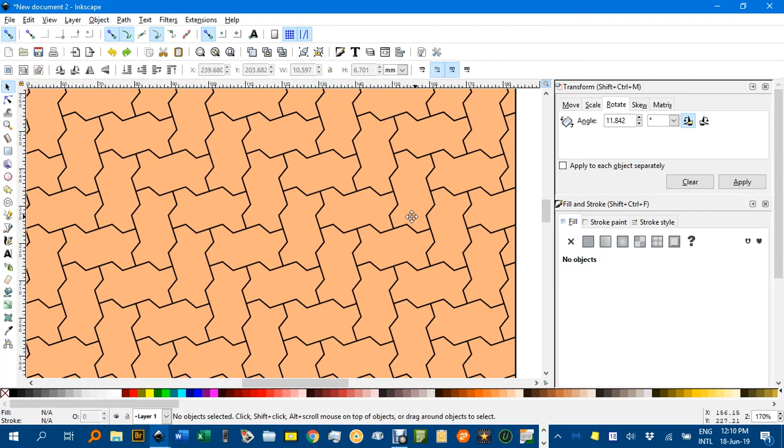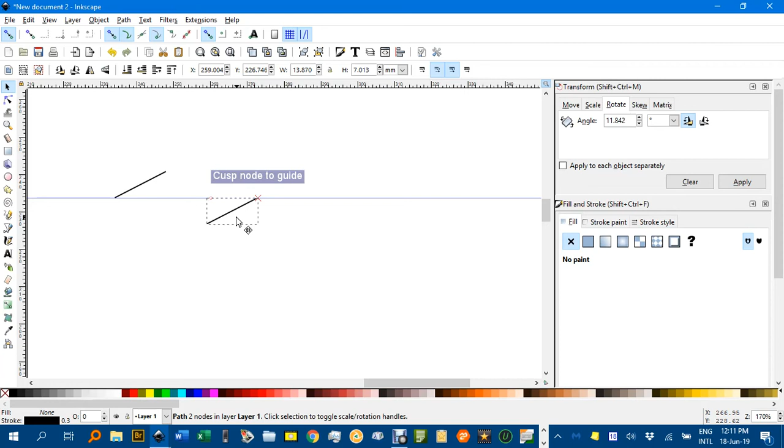If I move across, first thing I'll do is drag down a guide from the top ruler, horizontal guide. Then with the Bezier pen tool I'm going to click there and whatever angle you like, something like that, click and enter. Then select tool, Control D to duplicate, and I'm going to drag a copy of that so that it finishes on the same horizontal line.

Then select both of them, N for the node tool, just drag around those two middle nodes, and we want to join them with a segment there. So that's our key component. Now that I've got that, I don't need the guide anymore. I can drag that off.

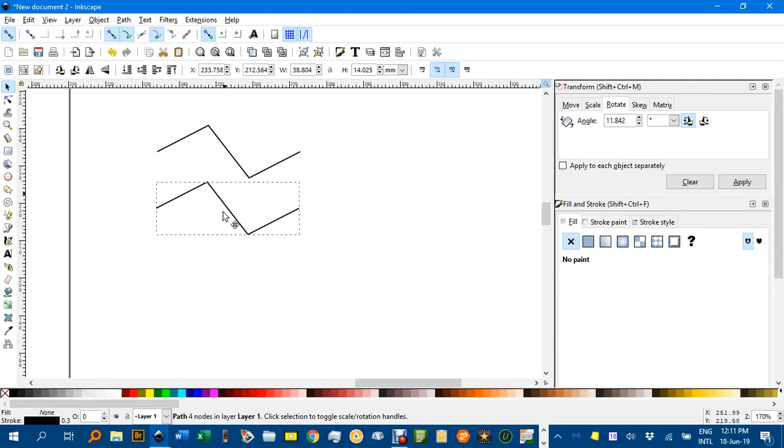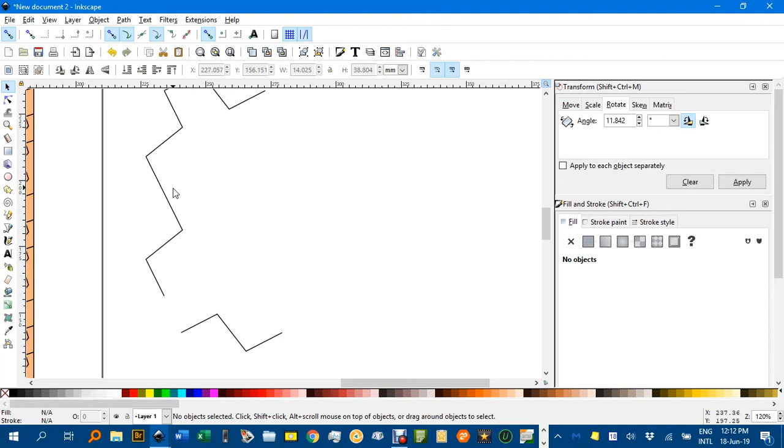Select that, Control D, and Control drag down. That one, Control D again, rotate, and let's snap it there. I'll zoom out a bit, and Control D again, snap it there. I don't want it snapping to the bottom one, I want it snapping to that one there. It's important that this section here is twice as long as the individual sections there.

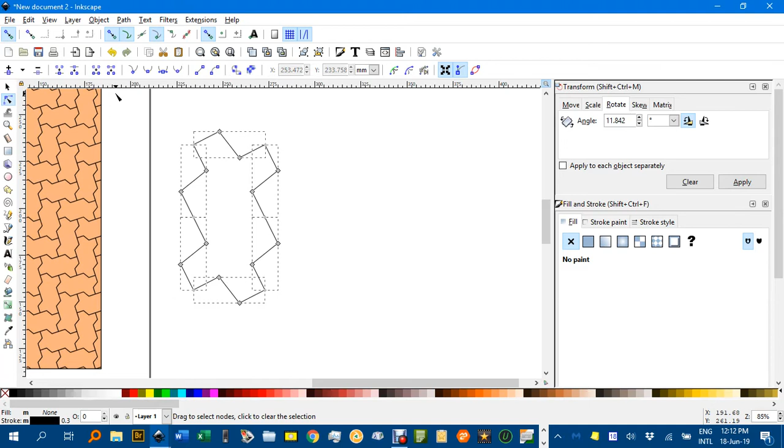Now if I shift click both of those, Control D and drag it across to there, this one should now fit and it snaps into place. Make sure you've got snapping tools turned on up here, snap to paths and cusp nodes. With that all selected, I then hit N for the node tool and then drag another marquee to highlight the nodes and click this third icon here to join the nodes and make it one object.

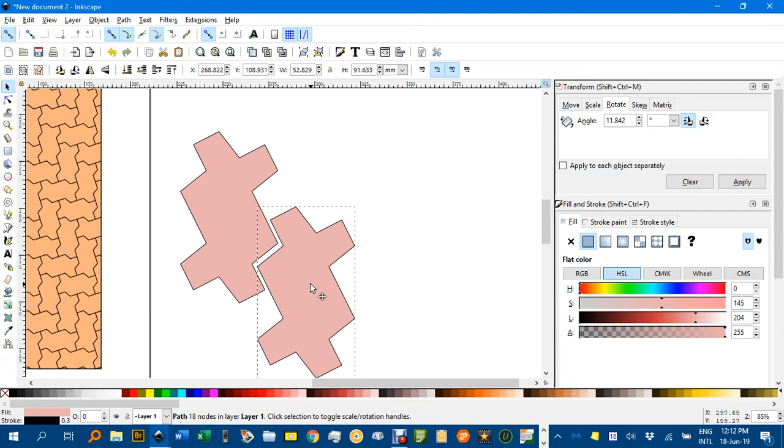I can give it a coloured fill if you like. If you want black and white, just leave it, but let's say I want that colour there. Okay, now I Control D and I can drag there. Look, I might shrink that down, they're pretty big, something like that. Zoom in and Control D and just drag down diagonally, I guess. Control D 4 times.

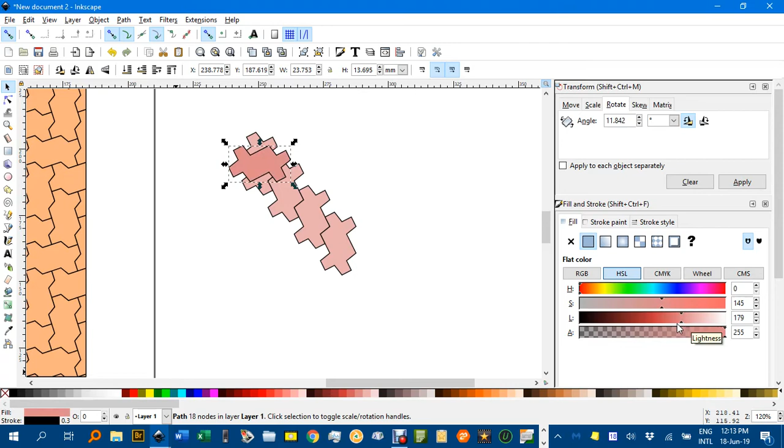With this one, Control D, I'm going to rotate it around that way. I might give it a slightly different colour. Over in the fill and stroke menu under fill, change the luminosity a bit darker if you like, and I'm going to slot it into place. It's not snapping, you can zoom in a bit, and Control D, I'm going to drag a series of those. Normally it'd have the same colour, but I want to point out some patterns, how I create it using this. Maybe one more.

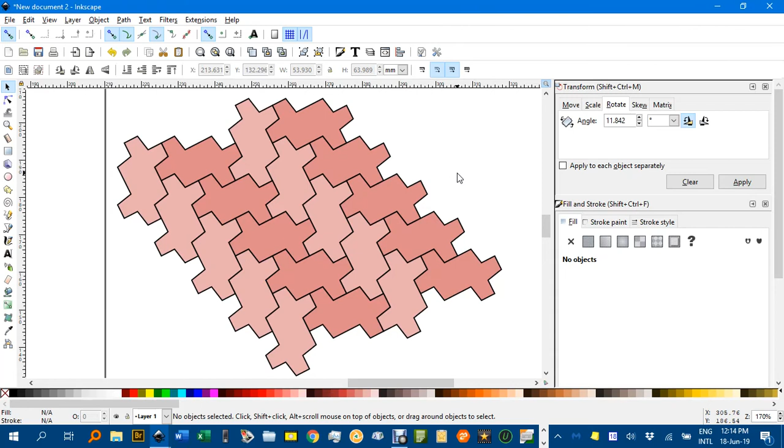Okay, one more there, Control D. Okay, shift click all of these, Control D to duplicate, and we'll put a series, snap them in there. I think that's probably just about enough, but just to be sure, I'll shift click this series of the light ones, Control D to duplicate, and snap them into place there. So you can see we've got a pattern a bit different to this one because of the way I set it up to start with, but they're interlocking.

Now with the rectangle tool, I'm going to click on a key point, let's say the start of the left side of this darker pink object, and I'll keep dragging until I get to the next left side there, and then I'm going to go down and, oh look, I'll stop there for the moment. You see I haven't got a square. If I repeated that square, you'd have this pink one overlapping this one. It wouldn't quite fit together.

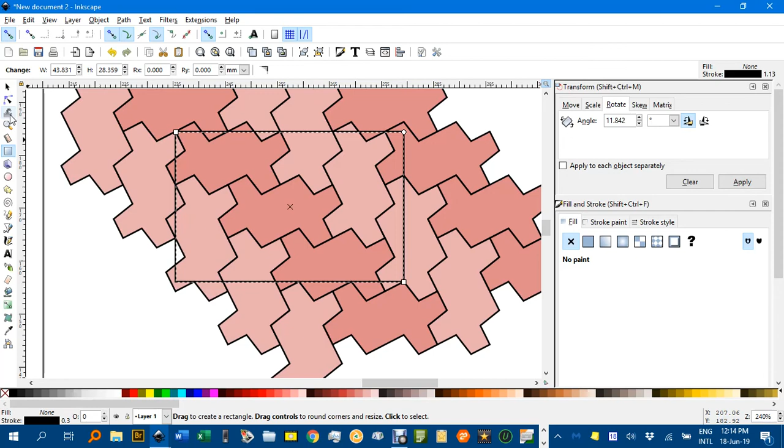So what I'm going to do is drag another row of these ones, shift click those, Control D and snap them into place there. Is that okay? Yep. And look, I might even do this one, Control D, just another one there, maybe that one, Control D, just to give me a bit more room.

Now back to this rectangle, click that, shift click, let's make it yellow to stand out, and I'm going to drag it down until it snaps to form a square shape, I think. Where's it coming from? From the top of this pink one here, down to the top of the next pink one there. I've got to find corresponding points, it's snapping there. I'll just maybe make that red, shift red, and bring it to the top.

Okay, now you can see that my corresponding points, I've started at the top left of a darker pink paver, gone down till I've hit the top left of the dark pink paver. Left to right, the same thing. I go across to a corresponding point in the same paver. So that now if you imagine everything in here in a square adjacent to this red square, it would fill in nicely. That would match up, so this little bit there would match up there, and so on.

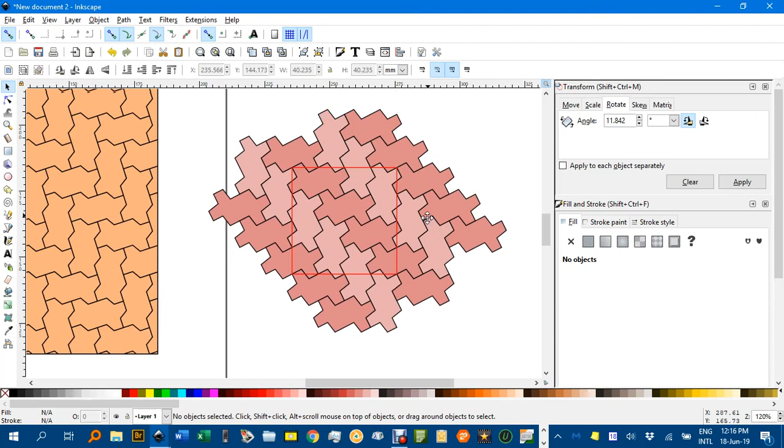Okay, with that all done, and make sure this square is on the top, drag a marquee around the lot, go Object, Clip, Set, and while it's still selected, Alt-I to convert that to a pattern. Now, if I want to test it out, you can draw any shape. I'll just use a rectangle. You can draw a circle, ellipse, anything.

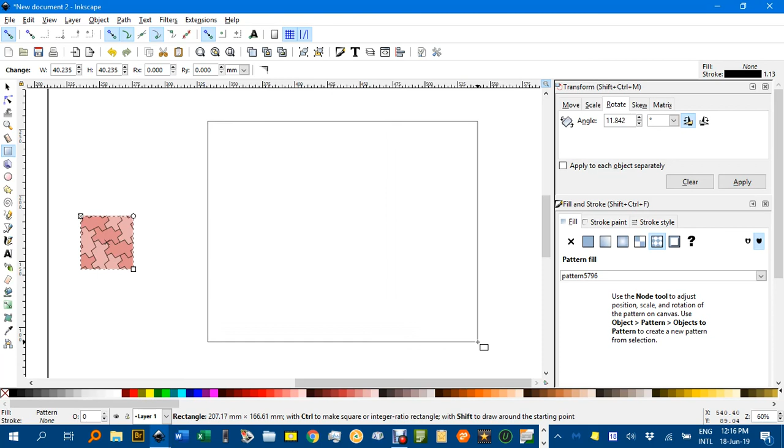Click the pattern fill. That's one I did earlier. It's not the coloured one. But under the patterns, the last pattern will be the one that we just created, and there it is. Now, if you didn't want those colours, you'd change them before we converted it to a pattern. But once again, if I click on that and then enter the node tool, these control nodes will be here. I like to drag them a bit closer to here, and they actually control where this starts within here.

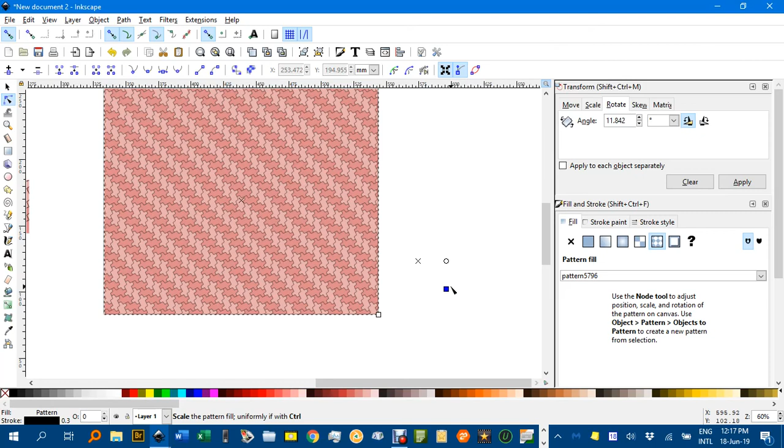See, if I move the cross, it moves the position of the pattern. Control drag the square to make them smaller or bigger, and drag the circle to rotate around. I'll Control Z. So there's an interesting little exercise on how I created those interlocking patterns. As I say, if you want black and white, you wouldn't colour them in the first place. If you wanted all the same colour, you'd do that earlier on before I converted to a pattern.